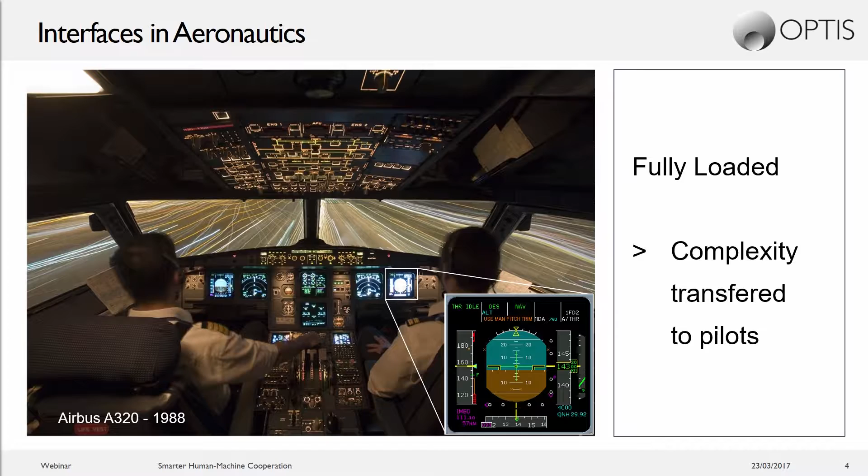It is the first narrow-body aircraft designed to be operated without a flight engineer, only by pilots. A320 interfaces become standards, and all following Airbuses and aircrafts from the competition till today have similar human-machine interface and system control philosophy. These interfaces give full control to the pilots, but they are fully loaded. The complexity of the machine is transferred to human pilots. The report from Boeing Aero magazine on the causes of accidents is clear.

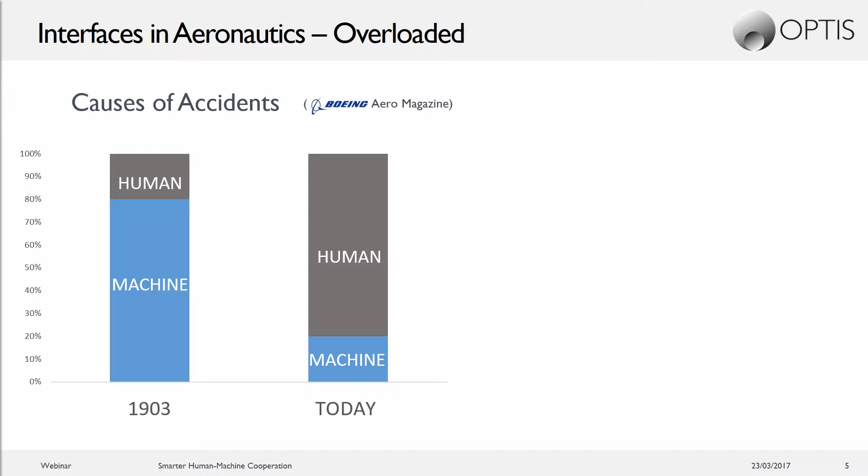In the early days of flight, approximately 80% of accidents were caused by the machines. Today, that statistic is reversed. Approximately 80% of airplane accidents are due to human error - air traffic controllers, mechanics, and pilots account for 80% of the cases. These errors are due to misunderstandings of the aircraft, misunderstanding of the HMI. So aircrafts incorporate reliable and advanced technologies, but HMIs, overloaded, are lagging behind and do not assist the pilots properly.

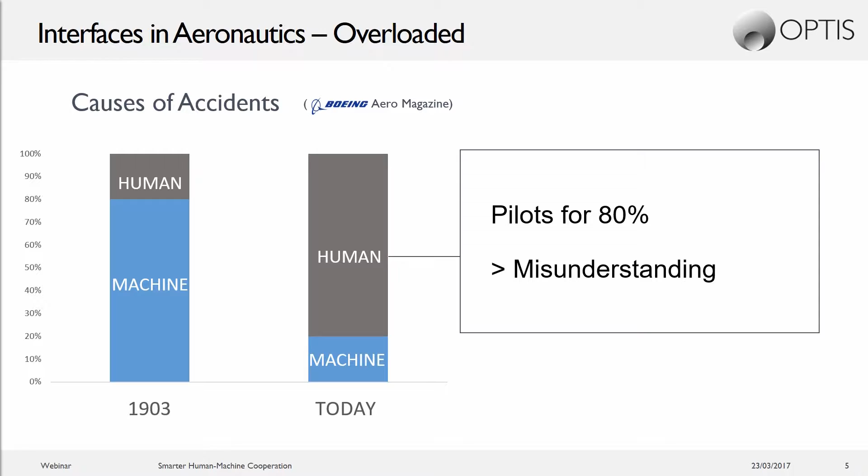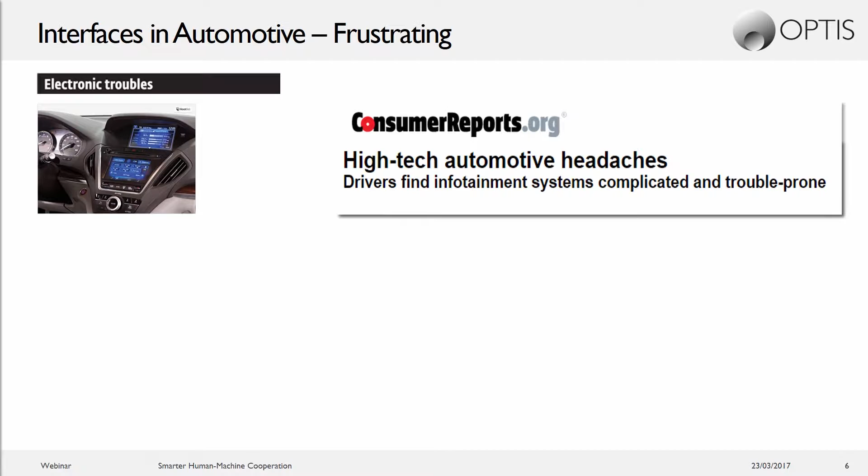In automotive, HMIs show advanced electronic features, but a 2016 consumer report described it as high-tech headaches. HMIs are complicated to use for older drivers, while younger drivers find problems using them too.

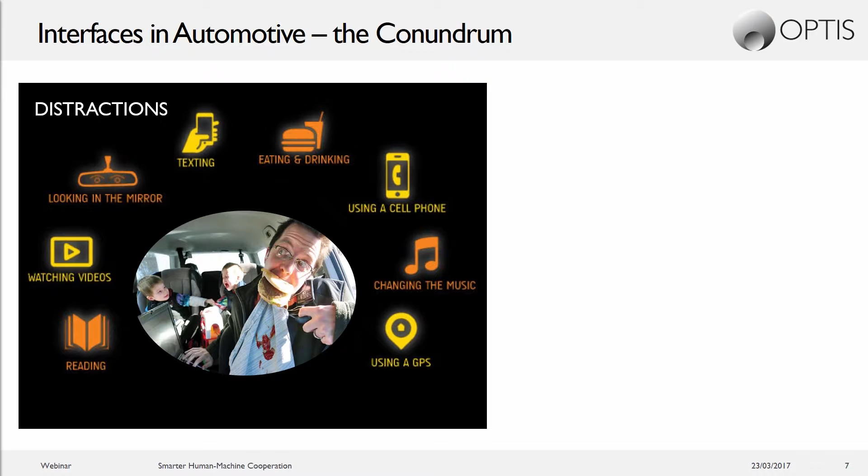Interface development in automotive is a conundrum for automakers, trying to stay relevant to car buyers whose lives are increasingly centered on their smartphones and other connected devices, shown here in yellow, but at the same time remaining mindful of a driver distraction problem that is already a factor in up to 30% of road accidents in the European Union, according to a 2015 report by the European Commission.

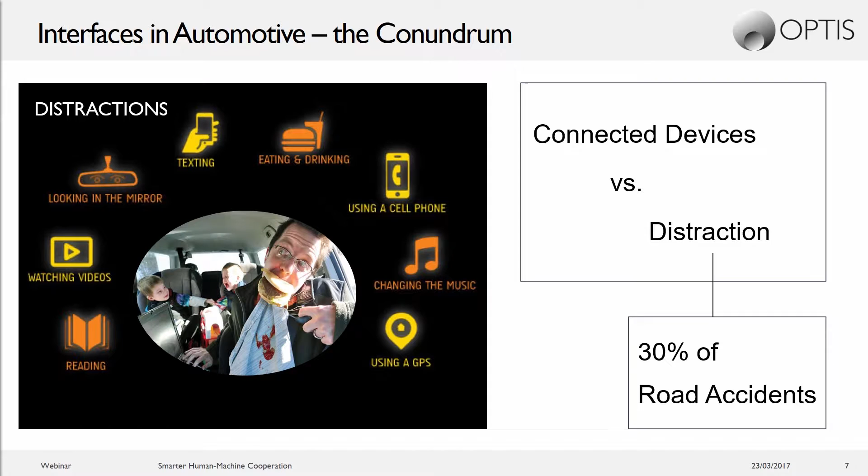So in aviation, like in automotive, HMIs have evolved to give full control of advanced machines, but the complexity of these machines has been transferred to users, drivers, and pilots, and this is generating safety issues. The future will hide complexity and show simple, intuitive interfaces coupled with smart virtual assistants. The technology will be based on screen sensors to interact with humans and artificial intelligence.

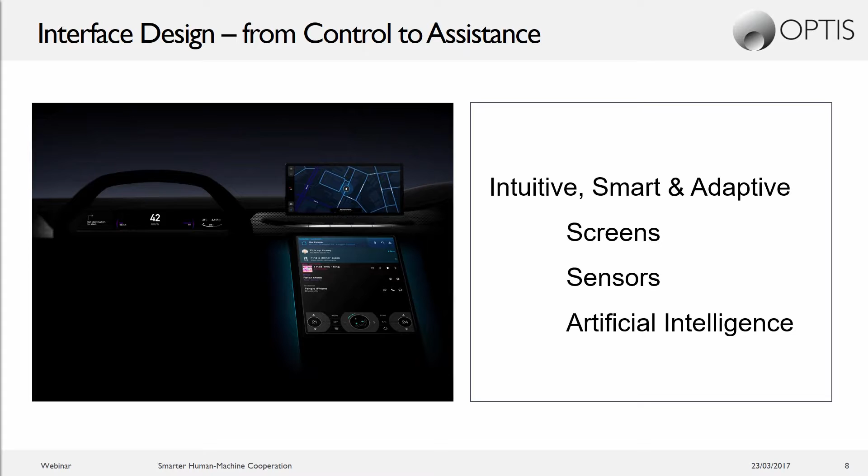What is OPTIS proposal? What is OPTIS vision? At OPTIS, we enable our partners in delivering innovative designs that have been tested and optimized for their final customers. We assist our partners in many aspects, including safety, ergonomics, and perceived quality.

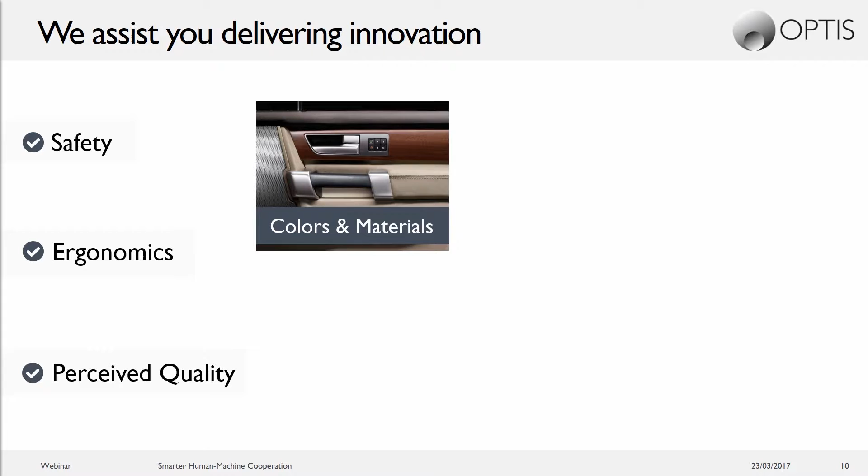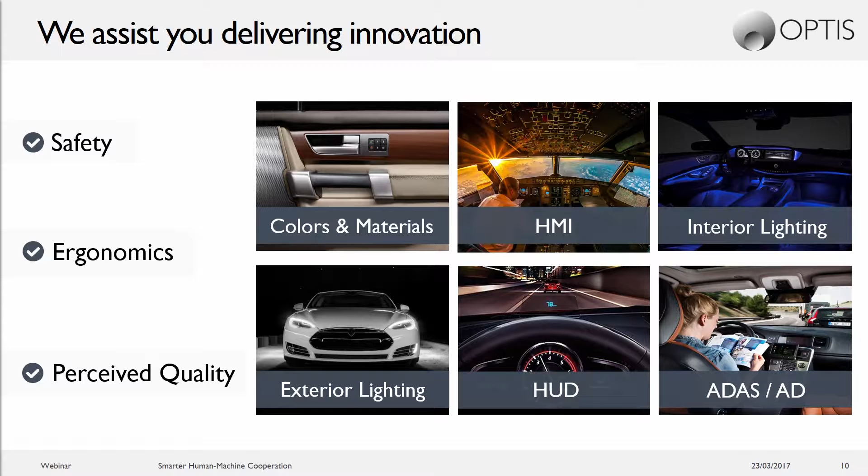This translates to several topics: color and material choice and uniformity, human-machine interface development, interior lighting, exterior lighting, and the current hot topics of HUD and globally advanced driver assistance systems and autonomous driving. Basically, OPTIS enables innovation for our partners anywhere lighting, human vision, and sensor vision are involved.

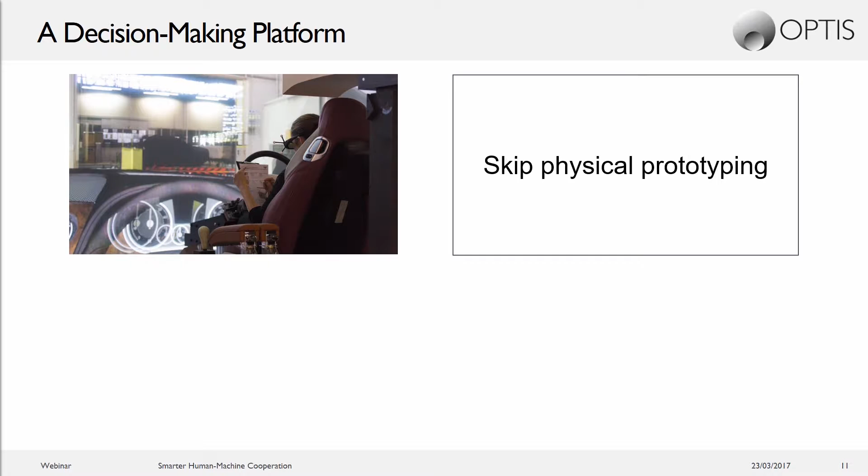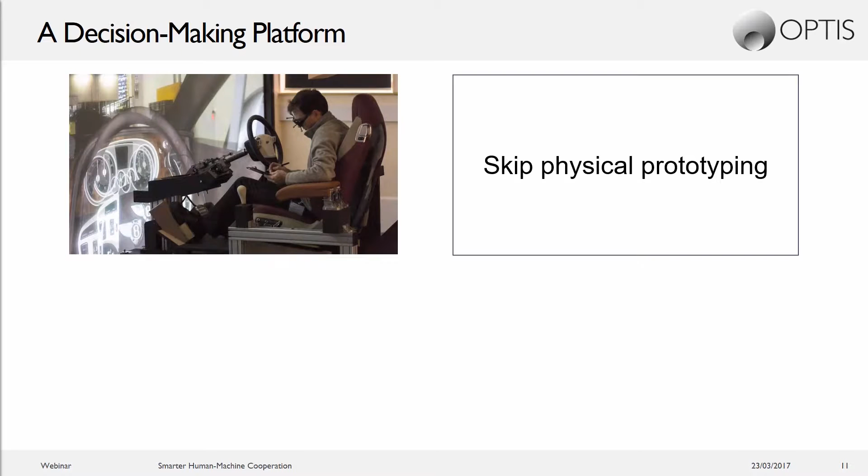The key difference of OPTIS proposal is that our powerful design platform offers a tangible decision-making solution. Don't wait until it's too late for the surprise of bad consumer reports or ratings. Create a virtual prototype and, in the beginning, share a scale-1 true-to-life experience in virtual reality with the makers and with your consumers. First, improve the collaboration, the concurrent engineering among the different teams internally and among the business partners, OEMs with suppliers.

Secondly, listen to the voice of the customers. From the early concept phase and throughout the development, focus on the perceived value of your innovations. Bring the value where it is most appreciated by the targeted consumer. Thanks to OPTIS's combined design and decision-making platform, you deliver the right innovations that reach the customers.

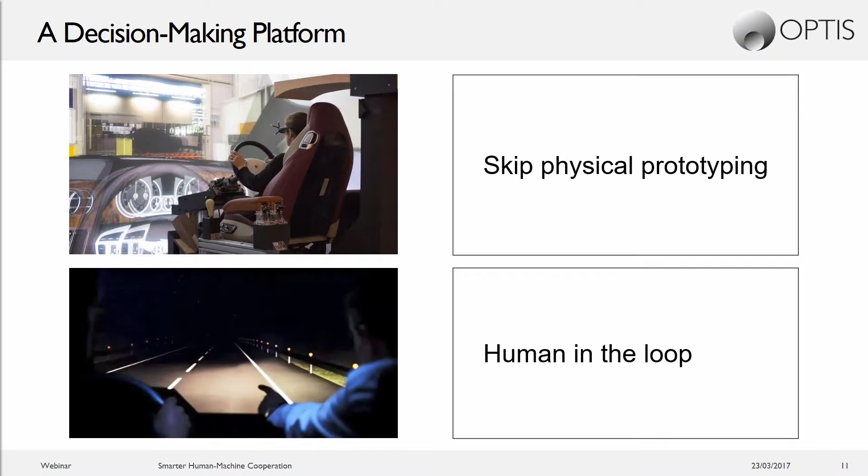Now I will let Vincent Gourdin, PhD R&D engineer in VR, detail our solution dedicated to the development of smarter interfaces. Thank you, Cédric. So our solution is a virtual reality platform in which new designs can be quickly evaluated in a realistic situation.

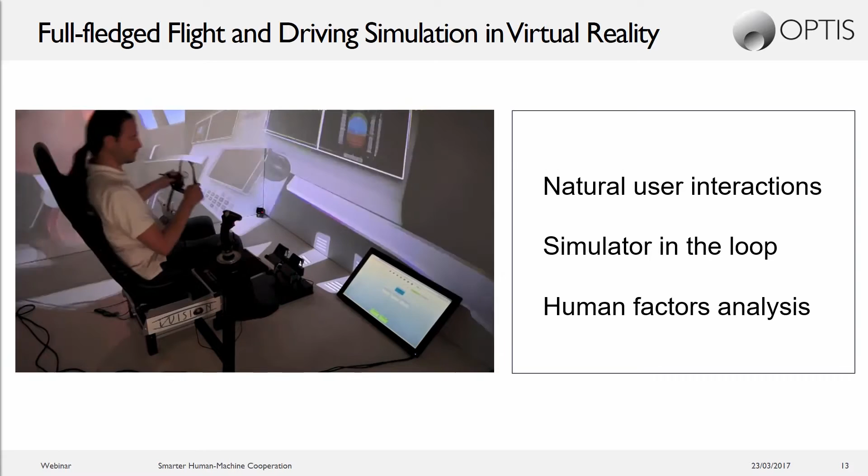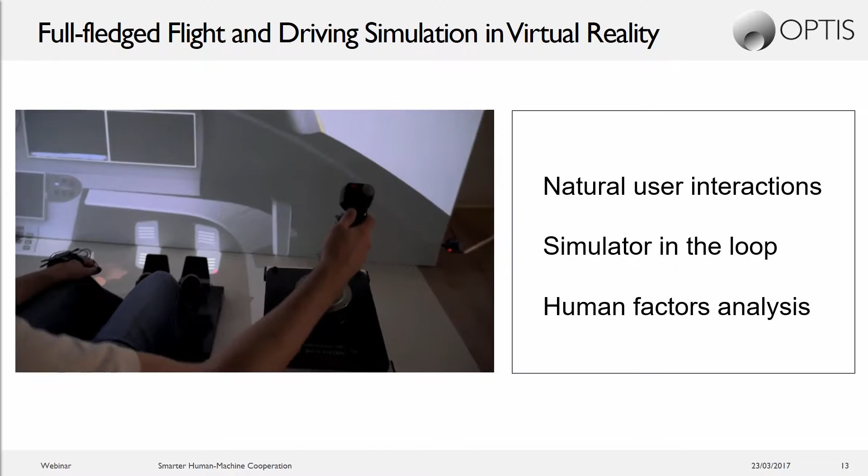We have an external environment that provides the immersiveness. The internal environment is interactive, featuring dynamic displays and finger-controlled elements. The vehicle is managed by an external simulator, ensuring its realistic behavior.

All this has one goal, and that is evaluating how a user is interacting with the new system, may it be a single interaction element, display content, or a completely new cockpit.

Human factors are evaluated much faster than traditionally, and no physical prototype is required, hence a much lower cost for each new simulation.

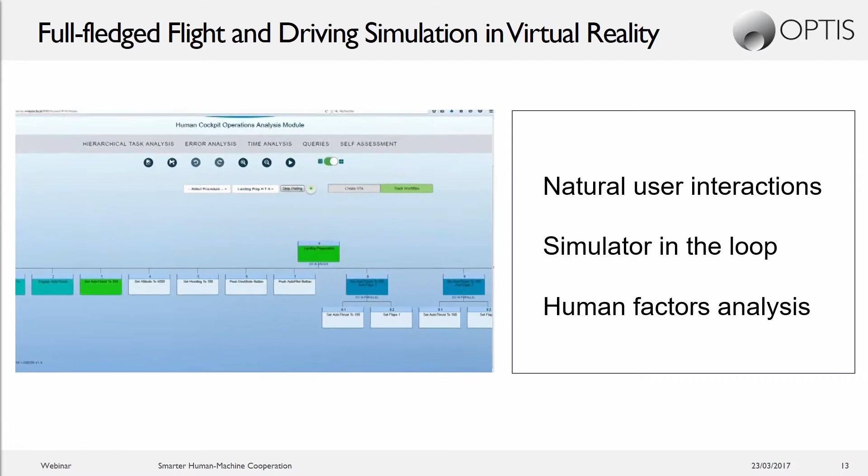The video you are seeing shows the prototype of the iVision project. It was a European project initiated by the end user, EADS Innovation Works, now called Airbus Group Innovations, to study how virtual reality could be used to validate human factors related to commercial aircraft cockpit designs.

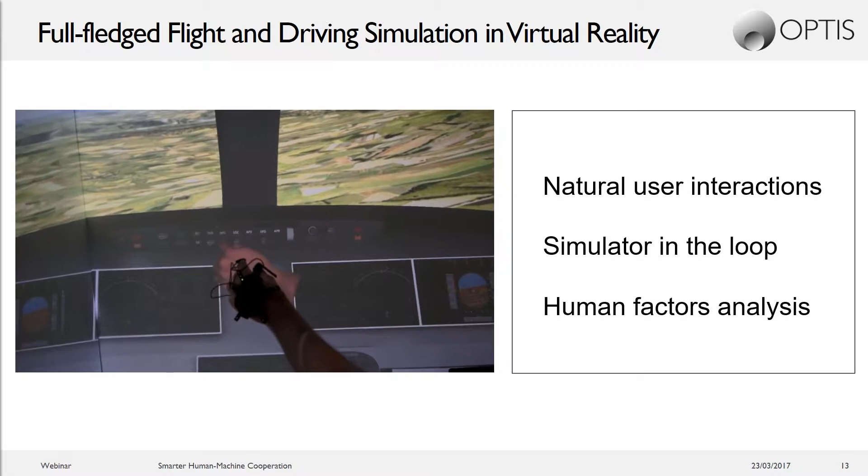The project is now finished since 6 months and showed that virtual reality can help a lot, greatly reducing the cost of human factors analysis in a complex environment.

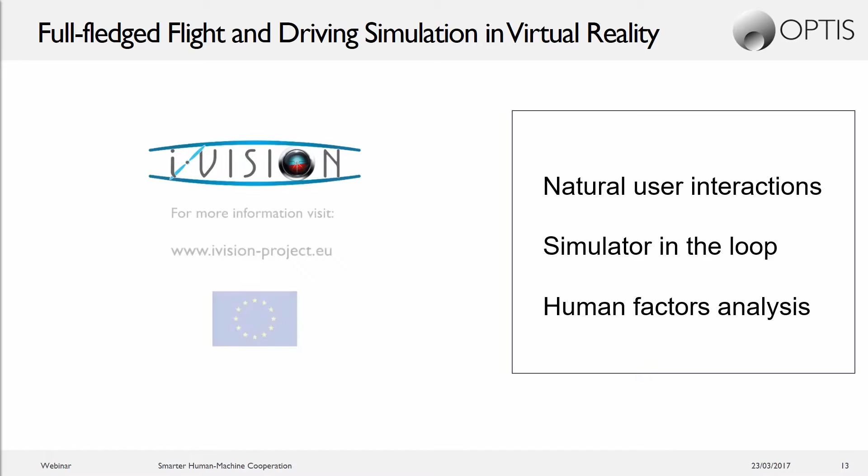We are now using similar techniques to evaluate human-machine interactions in a car cockpit in a virtual reality driving simulator. In this video, the external environment and aircraft controls are provided by the flight simulator, while in the driving simulator, a third-party software provides elements for the external environment, car dynamics, and also the traffic and pedestrians.

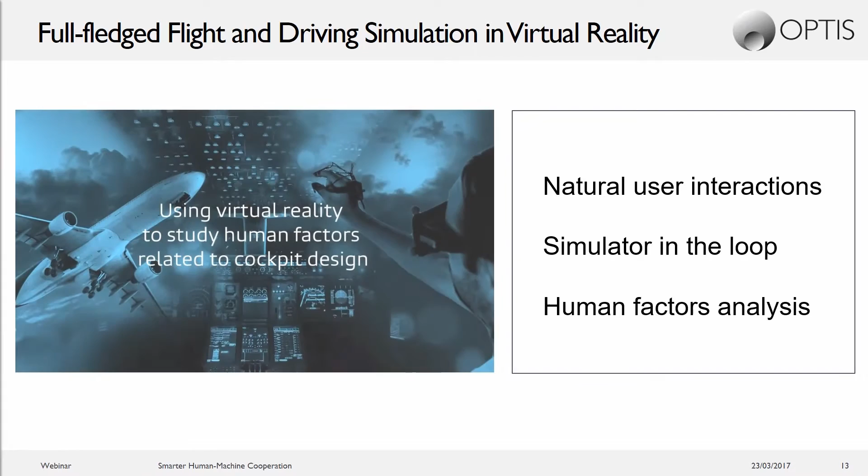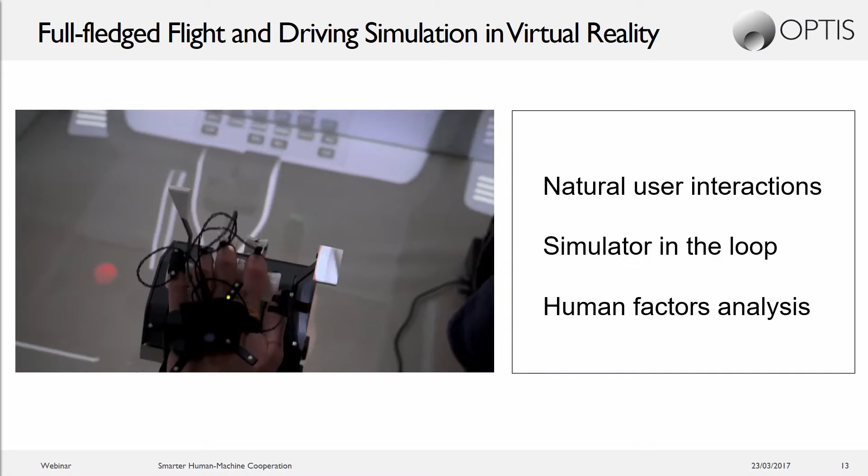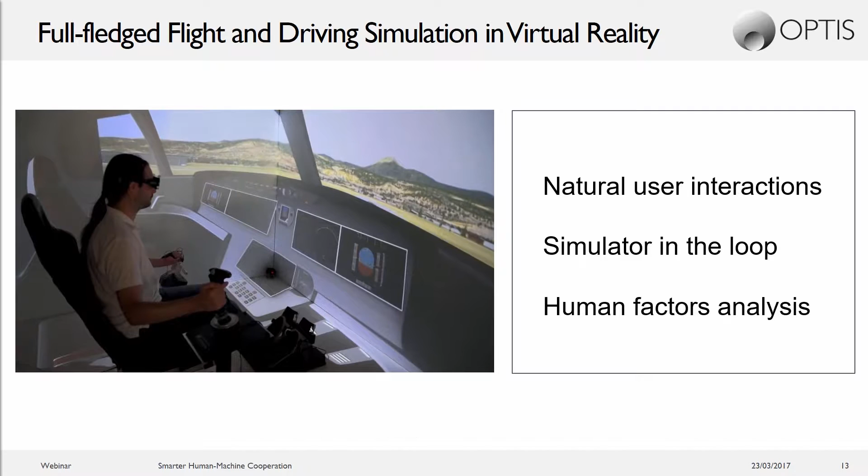In cars, we also have a new way of interacting, which is the touch screens. And as you can see here, the simulation is done in a cave system with 3 display walls in stereo, but it could as well be done in a head-mounted display, which is cheaper and even better for finger-based interactions because the physical hand does not mask the virtual hand.

So the goal of this European project iVision was to help designers and analysts with the study of human factors, and it's still the case with the new human-machine interactions. We can outline 3 categories.

The physical ergonomics, with the reachability of all cockpit elements computed using mannequin algorithms, as illustrated on the left, and with visual ergonomics, which includes many different features like field of view analysis, readability evaluation, brightness levels, reflections, and so on.

The cognitive ergonomics is centered on task analysis, and it can give information on workload and safety using methods such as critical time analysis, self-evaluation, or error detection.

Then the visualization of this data can be used for ergonomics as well, as shown on the right with a part of a workflow of tasks with the green arrows. And then the attractivity and adoption is focusing on the look and feel and the user experience.

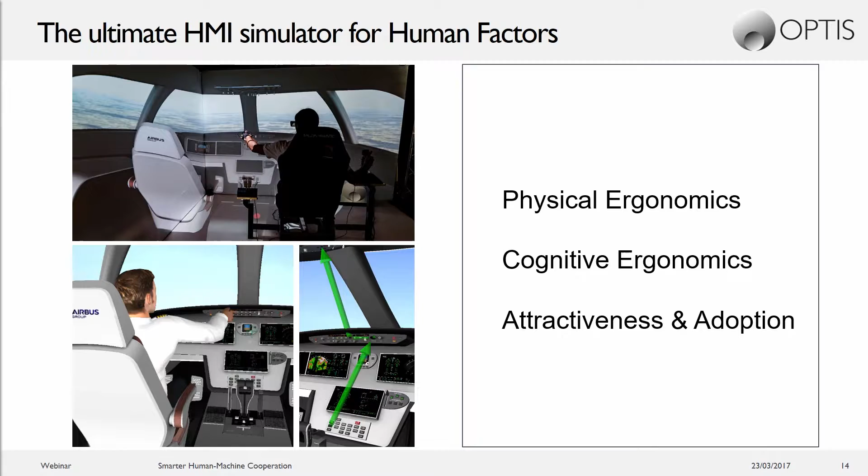So let's continue with the visual ergonomics. Visual ergonomics is very important because vision represents about 85% of human perception.

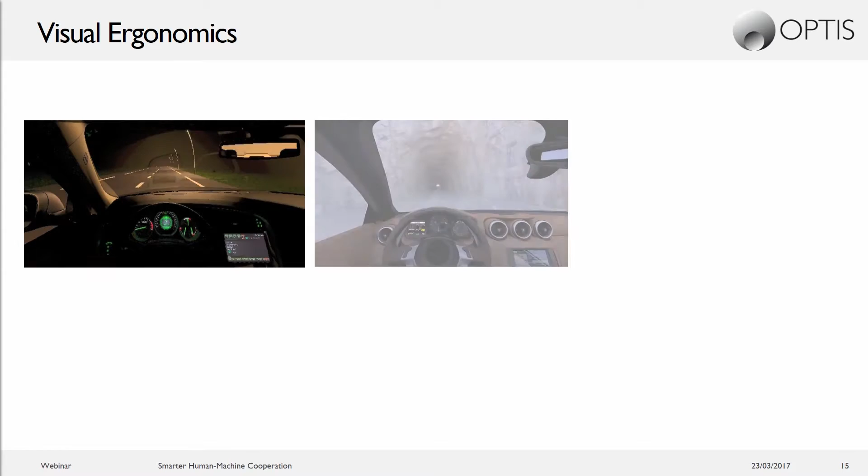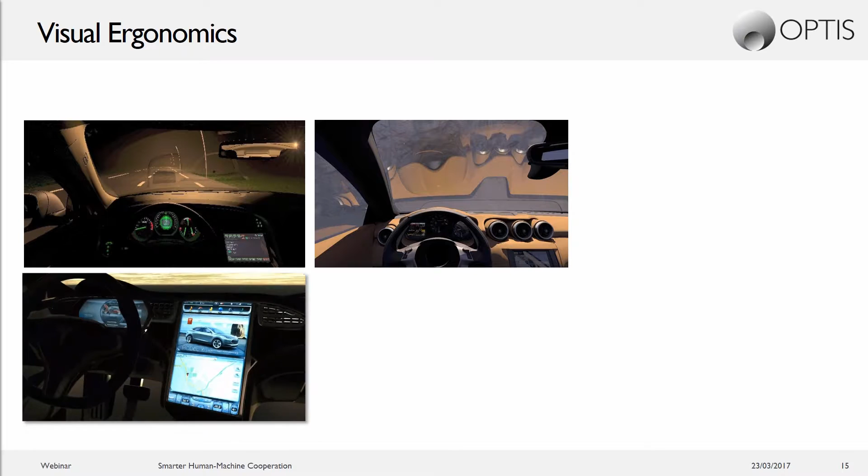And OPTIS simulations, as you can see, are able to reproduce day and night veiling glare, but also screen washout, retro reflections, aspheric mirror reflections, reflections on windows, readability and legibility of displays, and the effect of various lighting conditions.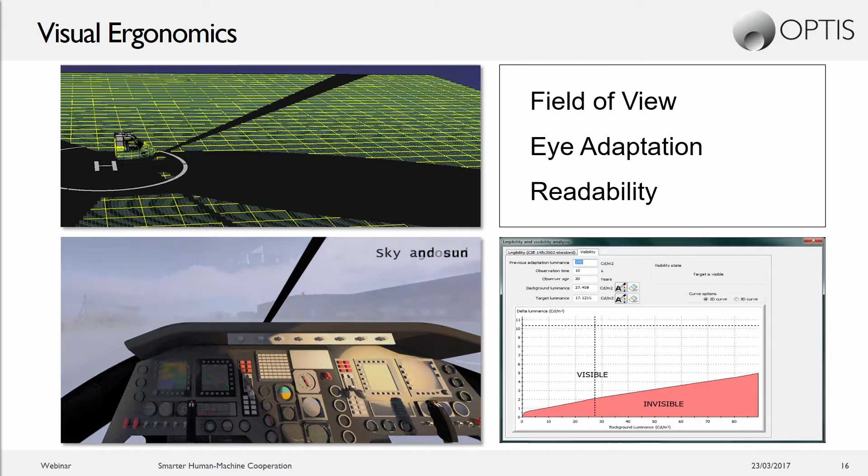It's very important because it's a real challenge, for example, for pilots to move from instrument flight to visual flight and reverse, because the light conditions can be very different.

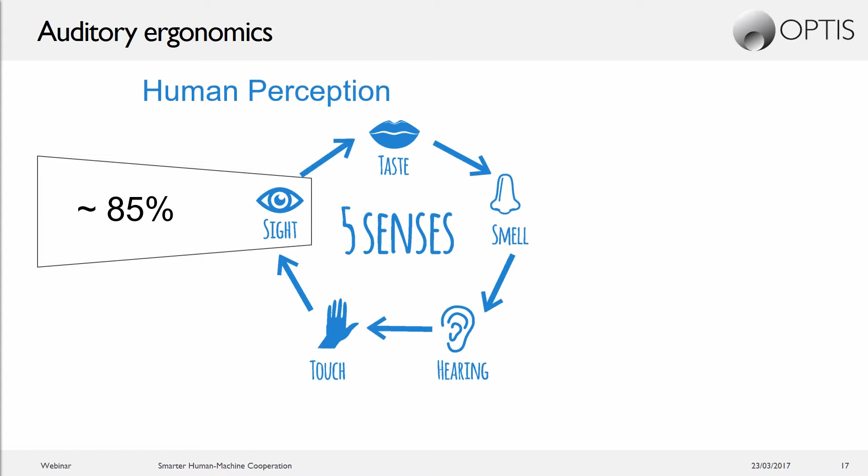And so we have seen that vision is very important because it's estimated as 85% of our perception. But according to Francis Ford Coppola, half of what you see is what you hear. It means that hearing counts as half of what you see, and that what you see is influenced by what you hear, and vice versa.

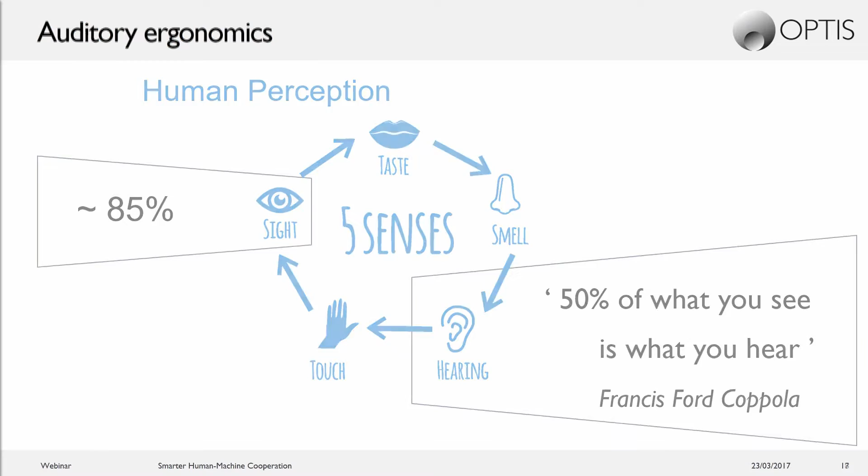So auditory ergonomics is very important as well. And for example, we have two main aspects at stake for the auditory ergonomics.

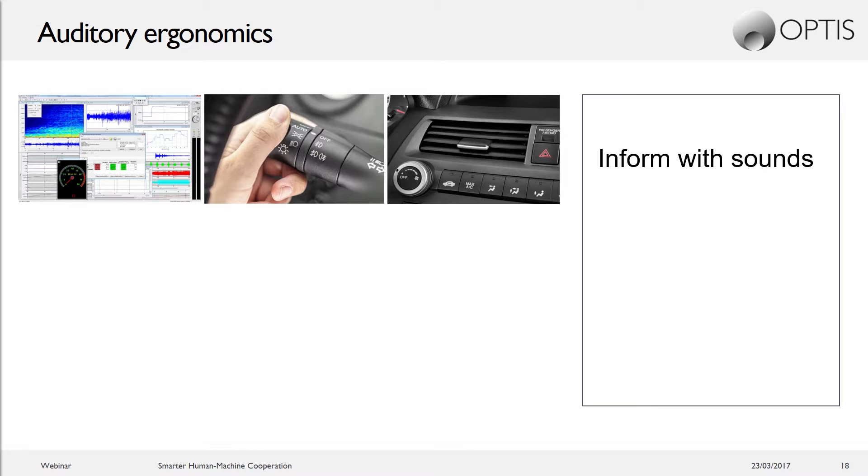The first is very well known, and relates to hearing feedback about what you are doing. For example, you don't necessarily see the signal of the turning light, but you can hear it in your car. Our software can help you design the sound so that it's best heard, or so that it feels better in a noisy environment.

The second aspect is that it's critical to detect and neutralize noise that could affect the behavior of the driver from a safety standpoint. HVAC generates a lot of noise that can disturb the driver and even cover the noise of external environments, such as honking of another car or a shouting pedestrian.

A good example we have is the story of a helicopter pilot who was frightened by a loud and strange noise coming from a poor HVAC, which was a kind of shock that evoked a malfunction or breakage at ignition. Our software is able to isolate such noises and help the designers improve the noise of each subsystem.

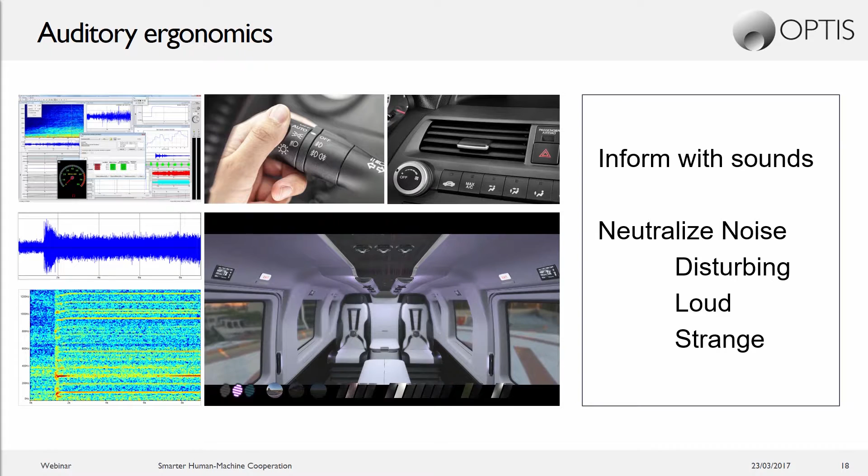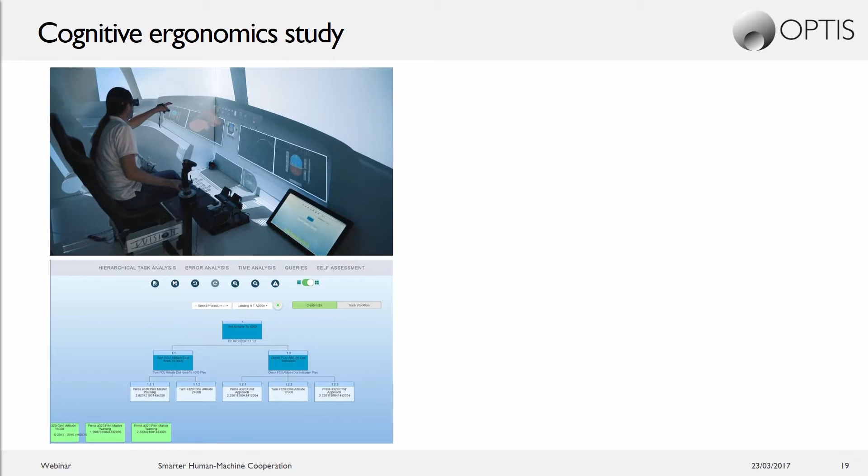Then about the cognitive ergonomics, I will show you what we had in the iVision project, the European project. Here is an example of how such a tool can help tremendously designers and analysts.

Usually, recording what's happening in a simulation was done manually with pen and paper and required a lot of knowledge from the analysts. Now, with VR, virtual reality, actions done in the simulation are automatically detected and logged, and appear in this interface as the green boxes below.

You can see it happen in the video on the screen that is on the floor. The green boxes appear at the end of each interaction. These interactions can be finger or eyesight interactions with a cockpit element, but also system information changes, such as enabling autopilot or reaching a speed threshold.

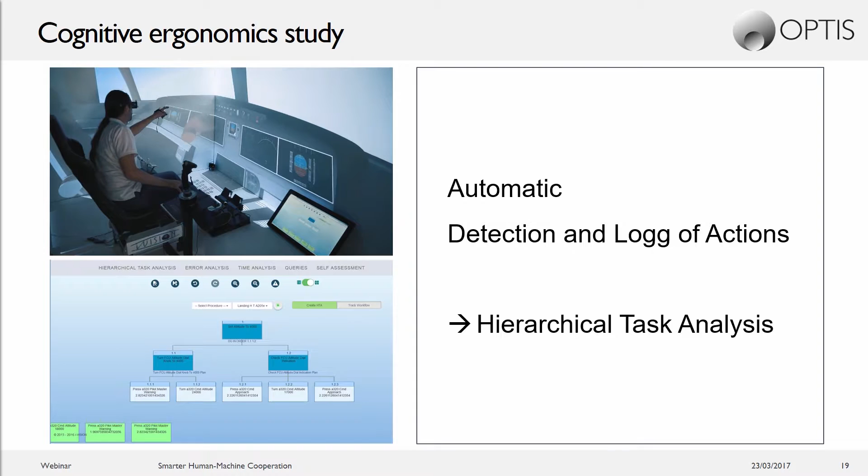The analyst then takes these appearing boxes and maps them to high-level goals that were already defined for a given simulation, and a considerable amount of time is saved to create a hierarchical task analysis, or HTA.

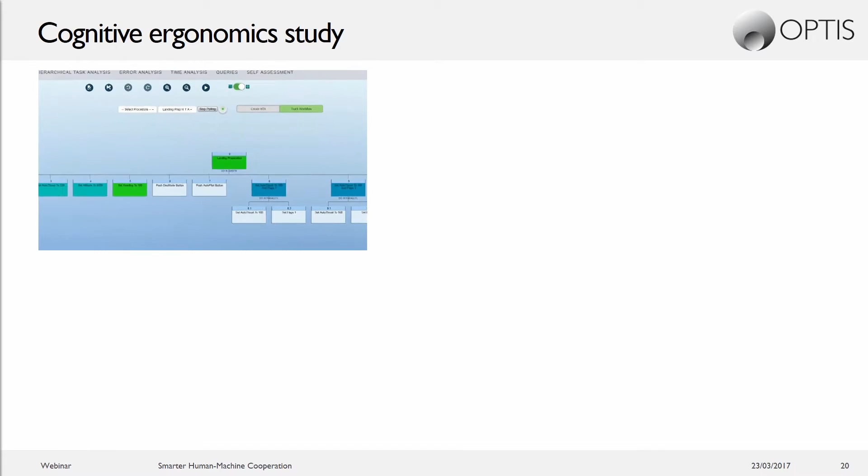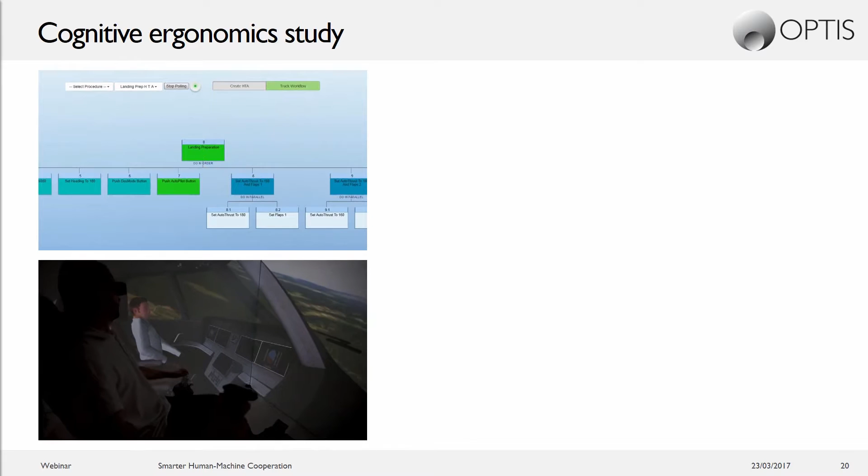And then from this HTA, as actions are detected in a new simulation, we can evaluate how well the task is performed by a pilot, or if deviation occurred. The system can also indicate the current active tasks for training purposes, possibly in VR.

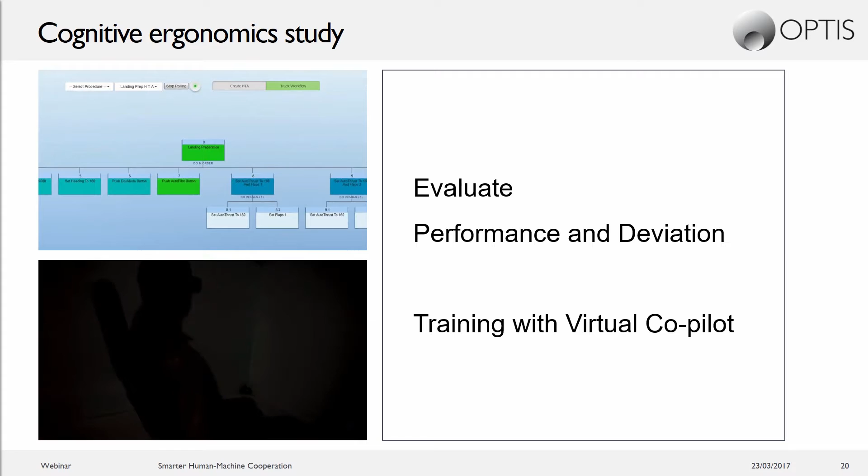The hierarchical task analysis can also be replayed by a mannequin as a list of tasks, and this mannequin could act as a co-pilot also for training purposes.

We can also imagine that we introduce errors in the hierarchical task analysis to see if a human trainee will detect the errors of the virtual pilot.

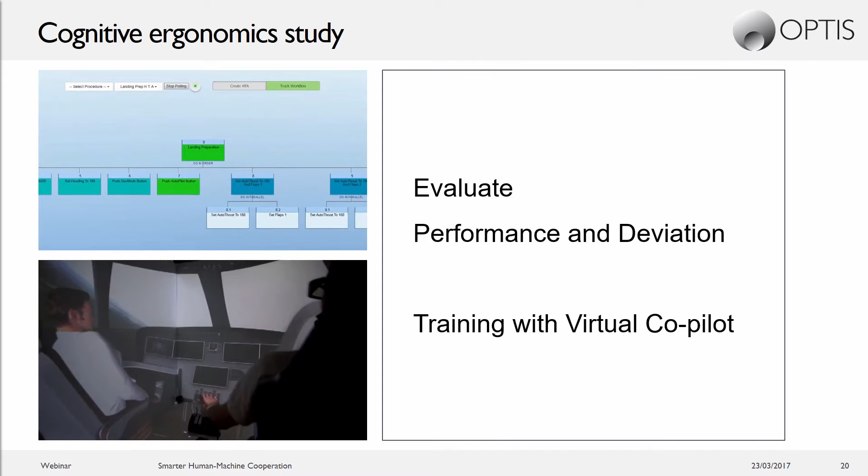So based on this hierarchical task analysis representation and the metadata it contains, other powerful tools were implemented, like critical time analysis, which computes the shortest time in which a flight procedure can be done.

Self-evaluation uses questionnaires at the end of a simulation to get feedback from a pilot and insights about his feelings. Error detection helps compute likelihood for potential errors in the design based on rating of independent actions.

And finally, the engineers can use special requests on the system, such as highlight the cockpit elements that were touched by the copilot during the landing simulation—so very complex sentences—or show the workflow for a given hierarchical task analysis.

That would draw the arrows in green here in the virtual reality view, allowing the designer to quickly see what the necessary workflow is to complete a particular task.

And as an aid to cockpit designers, the tool shall also allow cockpit variants to be compared. An overall grade can be given to a cockpit variant depending on all of these human factors evaluations.

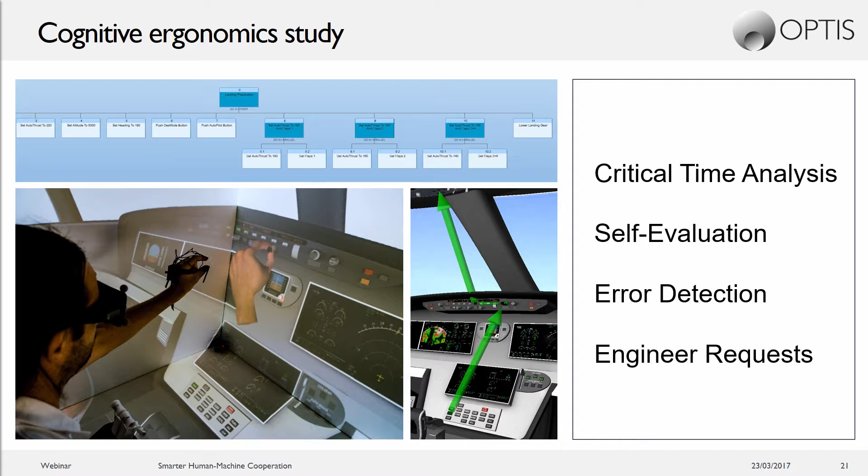And now Stefan will tell you more about the attractiveness and look and feel. Thank you. Thank you, Vince, for those insights.

So far, we have talked about physical ergonomics, how you see and interact with the product, and cognitive ergonomics, how you understand, apply, and remember the use of a product in an efficient manner. But this is not everything. What about the design, the look and feel of your HMI? Almost all industries are being disrupted by digital technologies, as you know.

Smartphones and tablets are everywhere. The experience they deliver has become a standard, an expectation from all of us. Now your customers want to use intuitive, beautiful, and fun HMI, and they expect this at the core of any product they purchase. As such, VR must allow the simulation of the newest HMI concepts in the market, such as touch screens. You can reuse your HMI digital assets in VR and interact with them as you would in actual driving conditions.

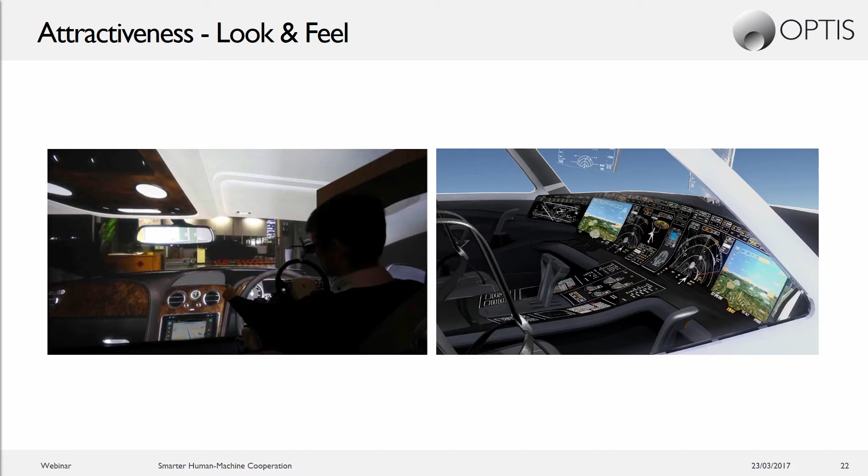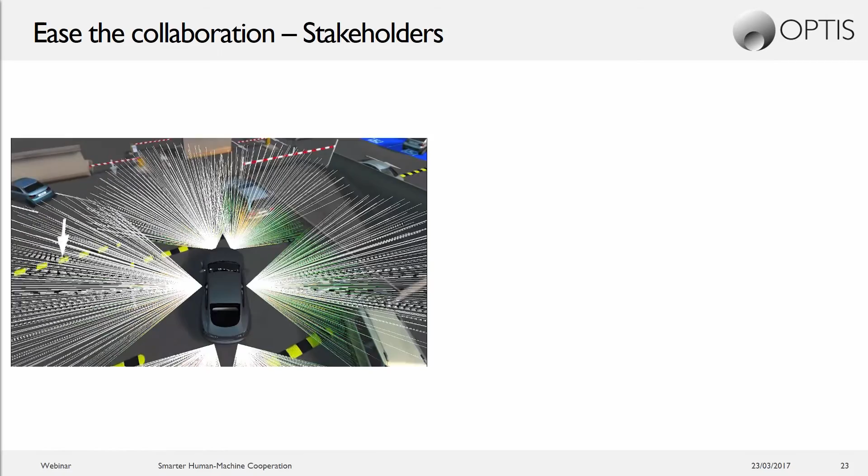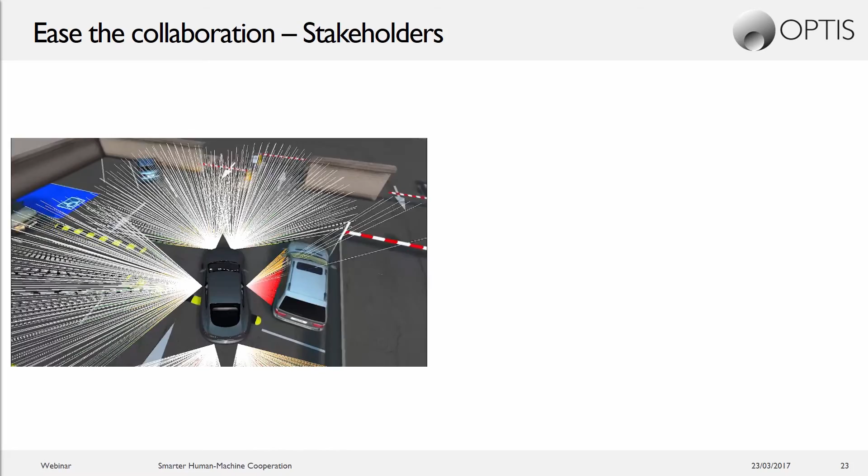All industries are heading to smarter and smarter devices, but that trend requires new tools to cope with the increasing complexity when developing a new product. To do so, VR is the ideal technology because it can put everything in context: product, environment, and the human, enabling teams from diverse expertise to share content and understand each other.

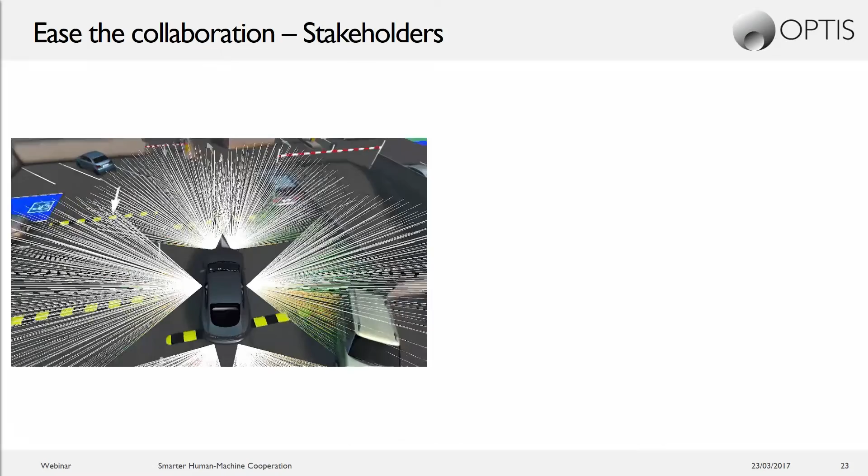VR allows you to see and interact in a natural way with your product, facilitating decisions and accelerating the product development cycle. For example, you can see on the left a sensor example. The body in white expert, the vehicle architect, and the ADAS expert can see the sensors at play for assisting the driver with parking.

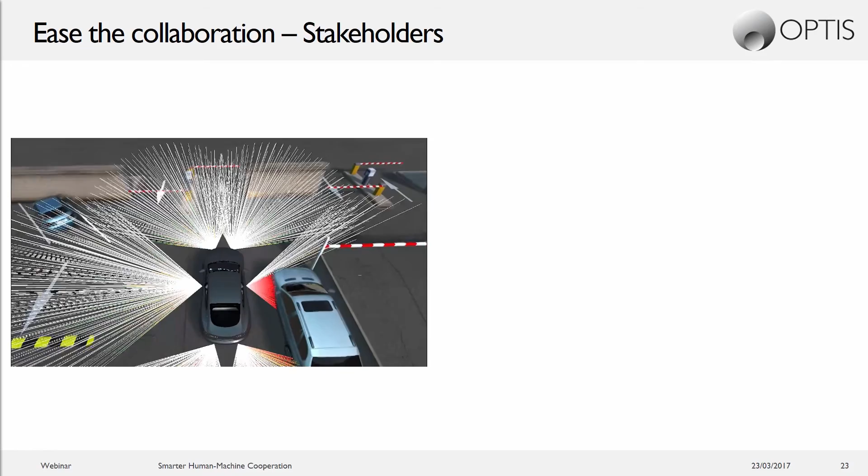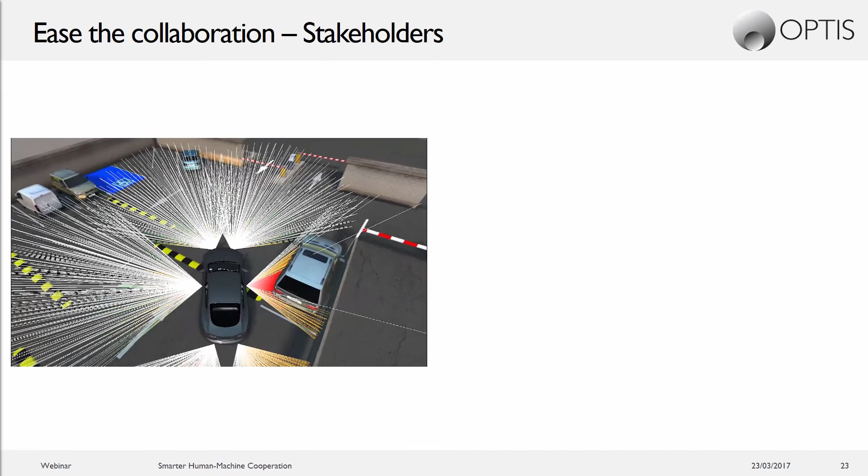They can envision several scenarios to pre-test the system and assess the impact of the vehicle shape in regard to the sensor's capabilities. On the right side, you have a pixel beam example.

The lighting engineer, the system engineer, and sensor expert can test intelligent lighting in many different situations, not only varying the car design and environment, but also the driver's behavior. You can pre-test accurately the impact of that system on the behavior of the driver to come up with the best solution.

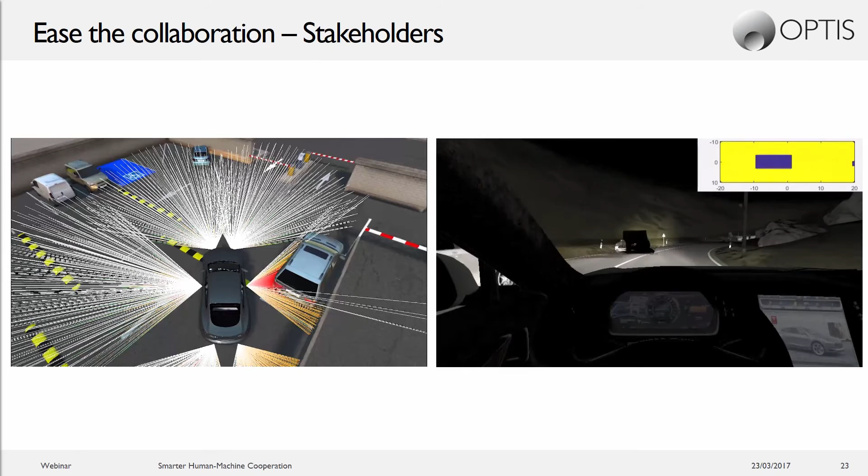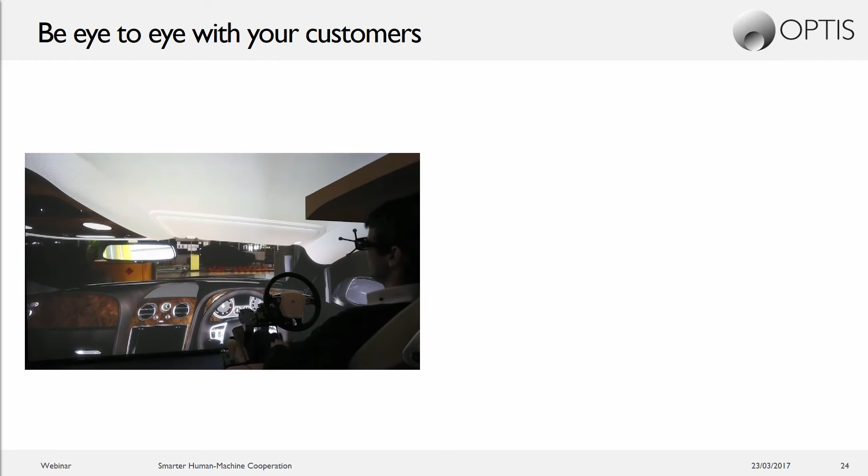From another aspect, having the end user in the loop will help you validate new concepts as early as possible in the product design cycle.

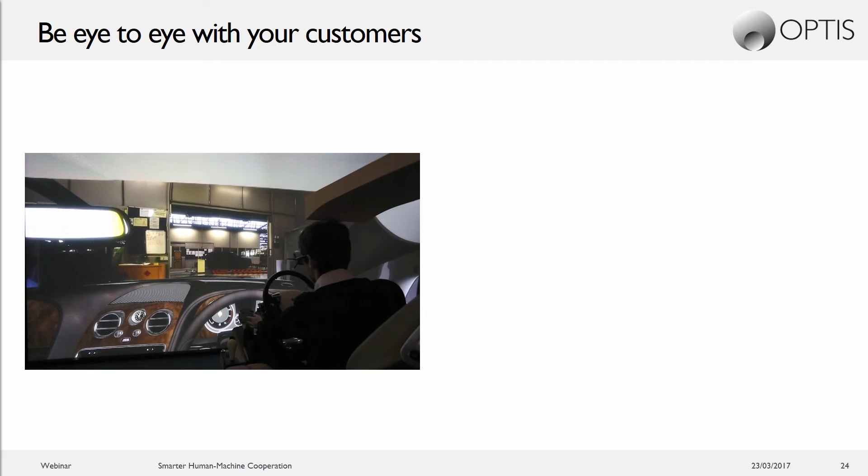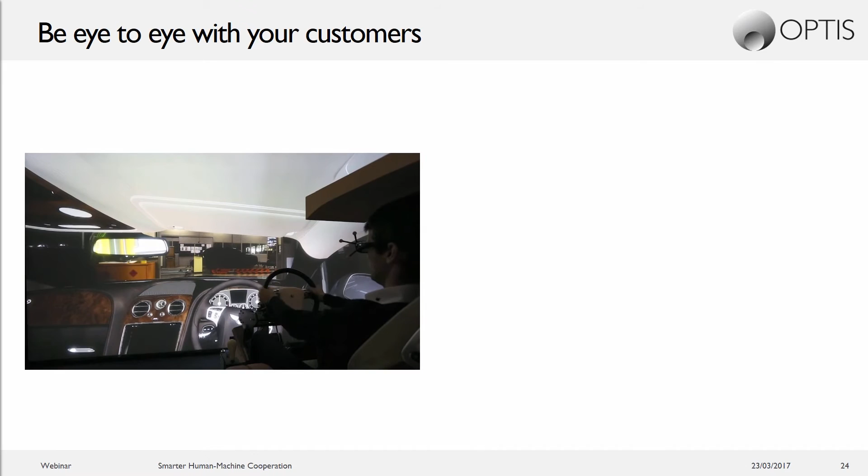Here on the left side, you can see that someone sits in a buck and acts as if he were in a real car, trying to feel the roominess of the car and access the car dashboard. On the right side, you can see an integrative example mixing car design and its dynamics, the environment, and the driver actually piloting the car.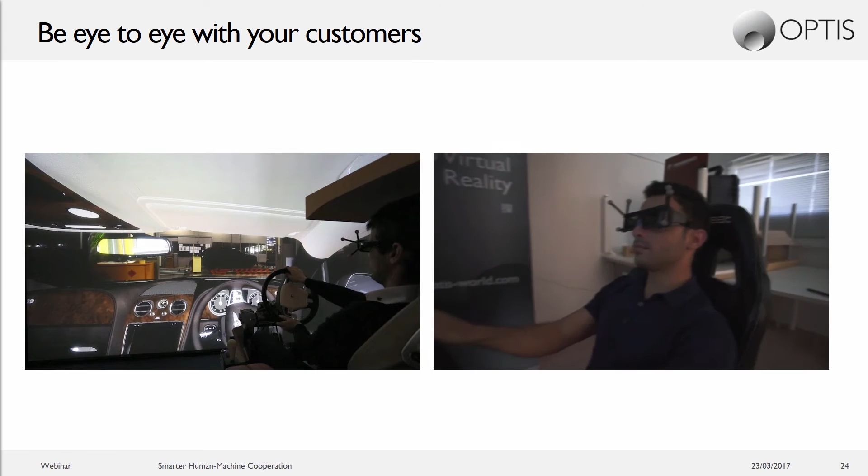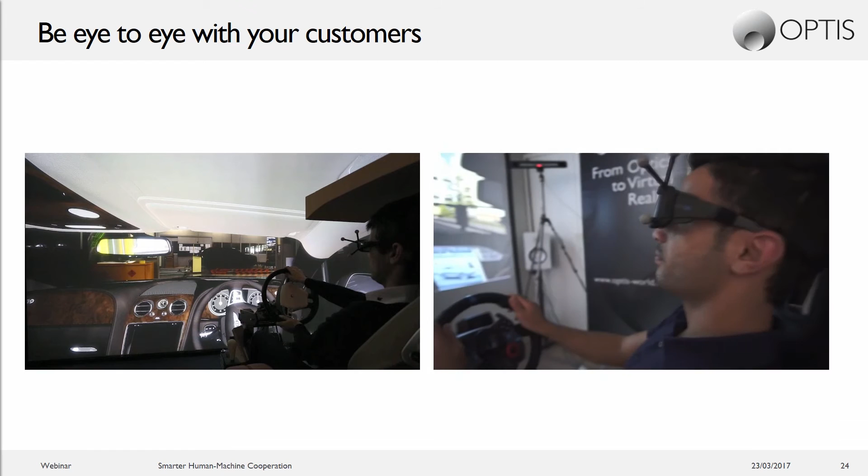Having an integrative approach involving the driver is the only way to thoroughly assess your HMI. VR is definitively the technology of choice for this.

Today we are working with key clients on those challenges to define those solutions, and they are part of what we call at OPTIS an early adopter program. This early adopter program deals with the following products in the OPTIS portfolio, allowing you to address those challenges.

The first component is VRX, allowing you to have the vehicle dynamics, the ADAS assisted driving testing with sensors, and the MIL, SIL, and HIL closed loop simulation. From another aspect, you have THEIA-RT, dealing with visual ergonomics in real time, including rear vision and reflection analysis. And you can also simulate your HUD in real time with optical considerations.

The last component is HIM, allowing you to simulate and analyze full body ergonomics, including finger and head tracking. And since you need to interact with your dashboard, you also need the hard switch and touchscreen simulation component.

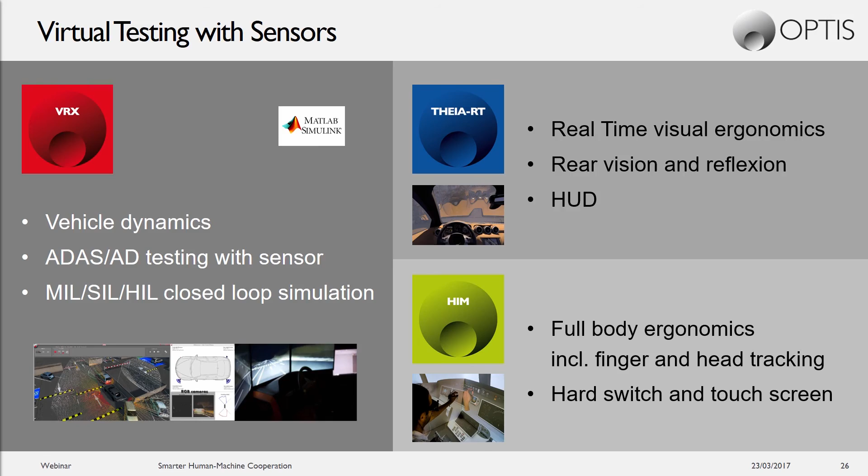To come back on the early adopter program, it is a group of strategic partners who are willing to share their experience to help OPTIS shape the next generation of VR simulation tools. The key challenges we have to overcome through that program are body ergonomics, virtual HMI interactions, and assisted driving technologies.

In return, this program will support you in innovating more by exploring new concepts, fostering collaboration among all stakeholders, improving quality overall by refining your design faster and avoiding mistakes and costly recalls, and finally, of course, saving time and cost by reducing physical prototypes and having leaner processes.